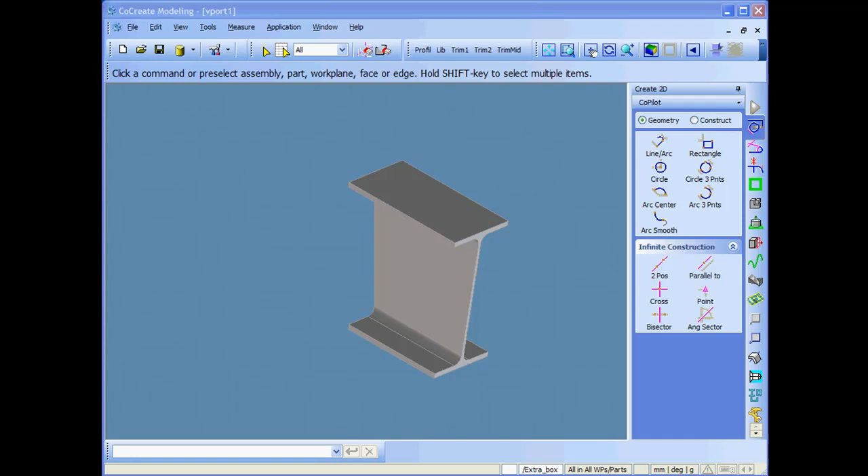So let's look at the screw connections in SolidGenius. Make sure the SolidGenius module is switched on, and here we have two profiles connected with two plates.

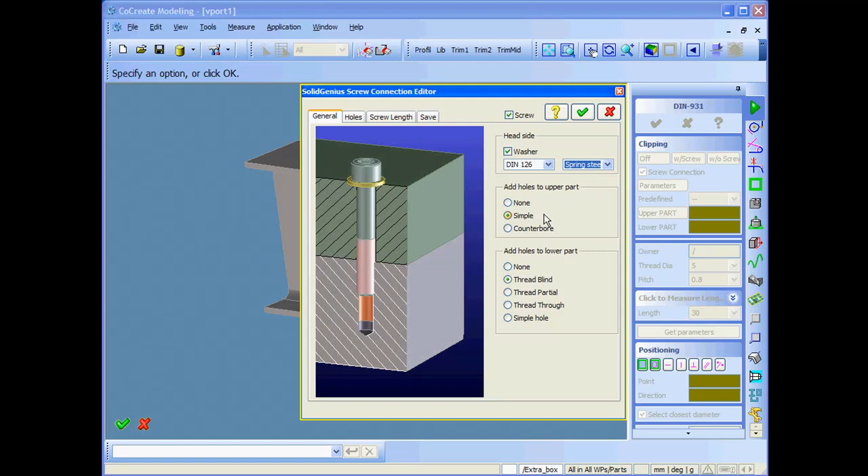I will show you a bolted connection consisting of screw, washer, holes on both plates, and nut. Let's select the screw. Every screw inside SolidGenius has its own screw connection menu. I select the parameters, visually setting the connection parameters. I select the washer with material, and on the upper part there will be a simple hole, on the lower part a simple hole as well. The holes will be machining holes, and I select the materials for washer and nut.

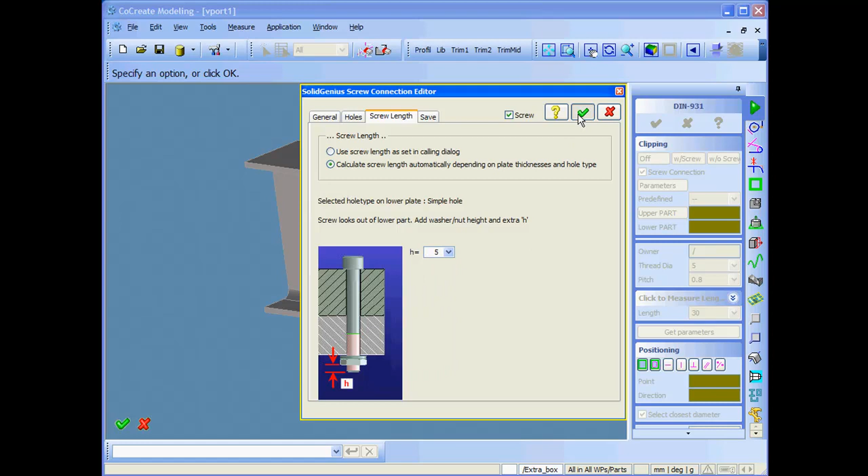In the second tab we can set the chamfers. The third tab lets me decide how much the screw looks out of the nut. That's all. So I select the upper part and the lower part. Now I just have to give a point for screw direction, and here we have some work plane and construction geometry functions embedded into the menu. This gives you the chance not to leave the dialog.

So here I can directly draw some construction geometry to set the position of the screw. This work plane will automatically be deleted when I leave the dialog. Let's set some lines. Now I got the middle points, and simply by selecting the point on the 2D, I select the diameter of the screw.

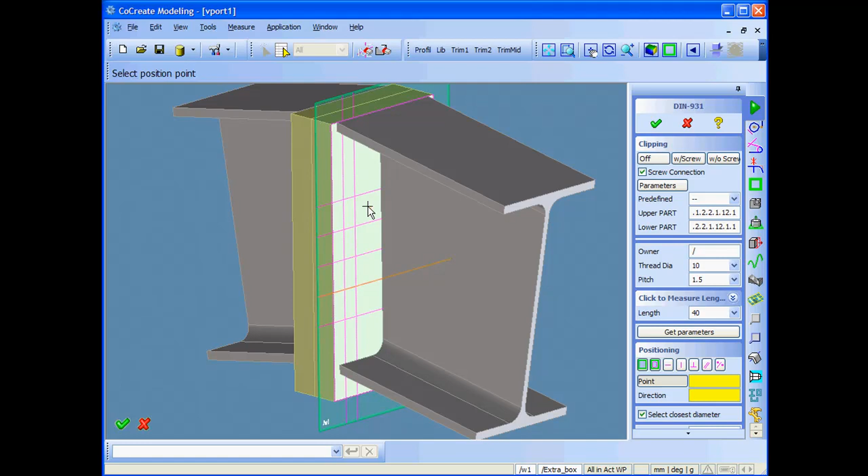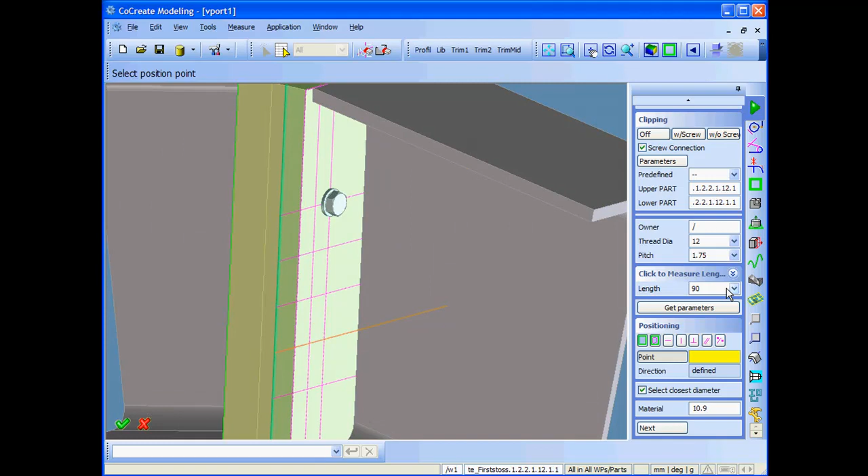The length is not important because it will be measured automatically. Even if I set any length, once I say next, the length will be calculated automatically. I change the diameter to make it a little bigger. Now I say okay, and you will see that the length of the screw has been automatically adjusted to the thickness of the plates plus the nut and the washer.

So I can immediately go to clipping plane, make a check without the screw. As you see, there are two machining holes, both simple holes, created on both plates automatically.

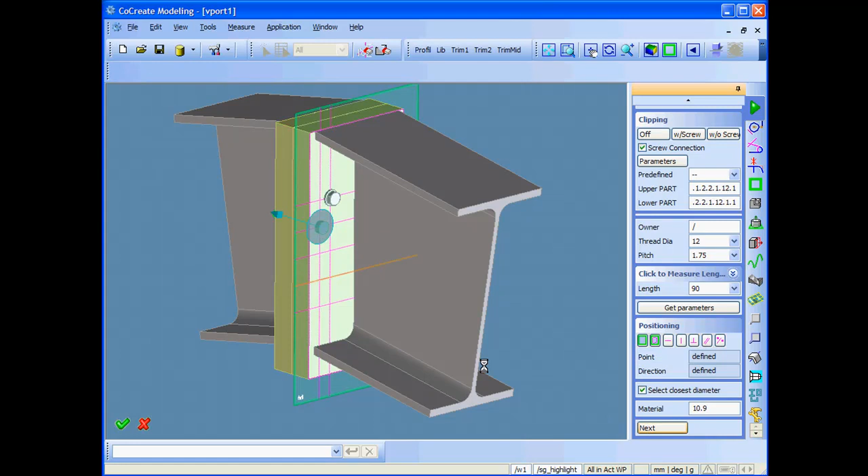Alright, so I continue. Next step, I stay in the dialog and keep selecting points, and with the next option, one by one, I do all necessary bolted connections.

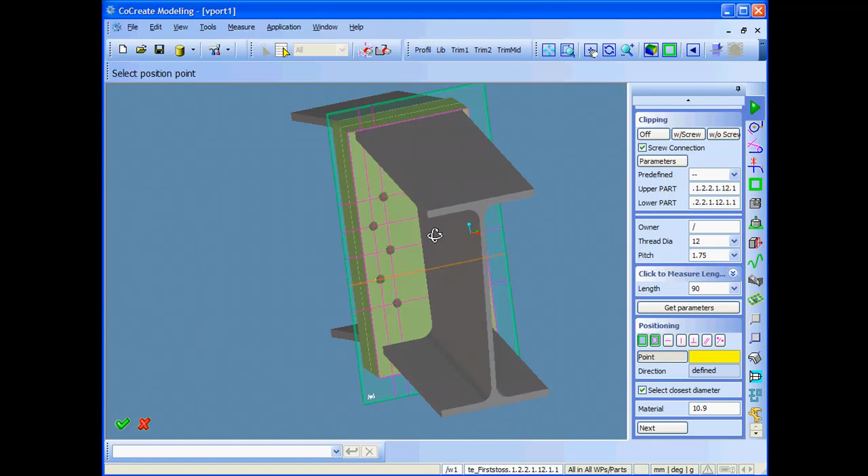Alright, now as you see we are all set. The holes are here on both plates. Now I want to continue on the other side.

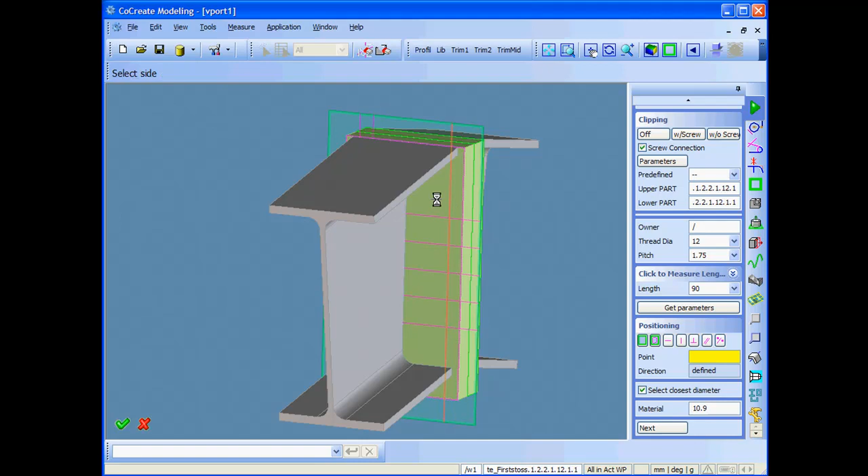I still stay in the dialog and add parallel lines 20 millimeters. Okay, that's all. Then I again select the middle point, and with the next button, because the parameters are still kept in the dialog, I just keep putting further bolts.

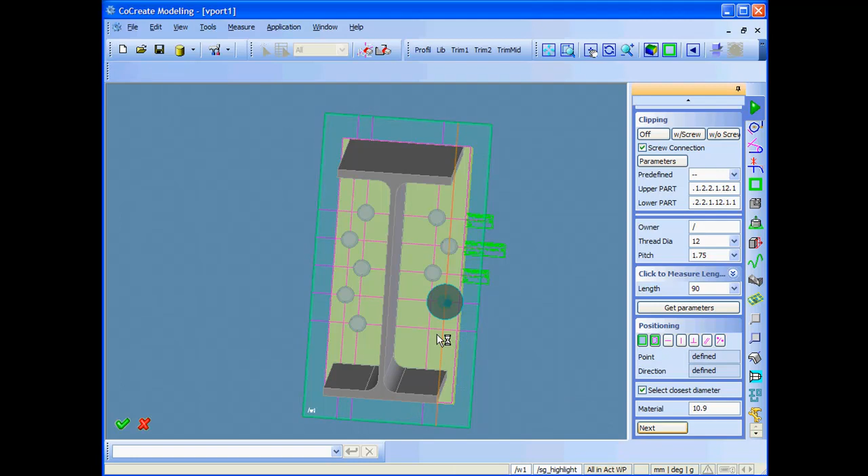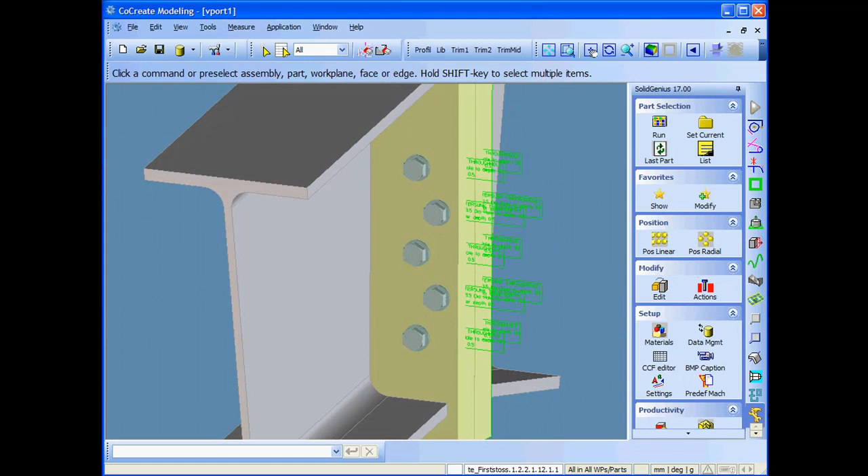Okay, this was an example with two plates. What would happen if you had more than two plates? SolidGenius also supports connections with more than two plates. In this case, all you have to do is define the upper plate as the first plate and all the other plates as the second plate.

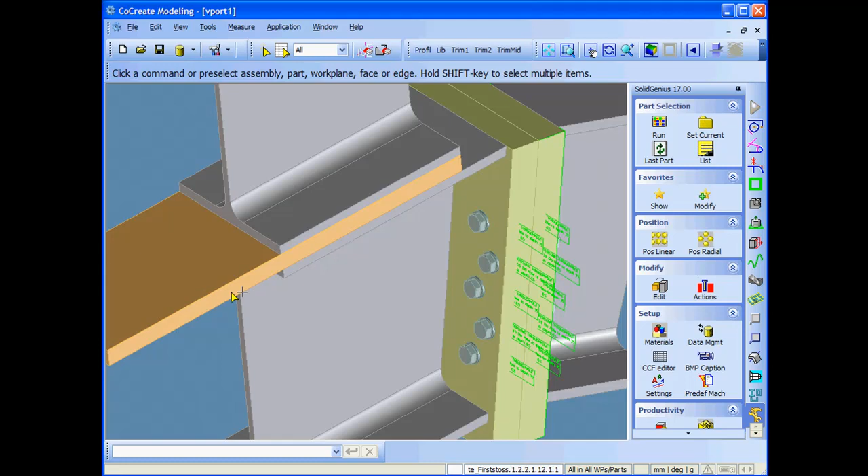So as you see, they're all shared parts, all the screws and nuts. Here's the example with three plates. We have plates 1, 2, and 3 which we want to connect. I select the same part, and the parameters are left over from the last selection. That's why I simply select the upper part as the first, and both parts in a row as the second and as the lower plate.

Okay, so I've selected two parts as the lower plate, and put the work plane again, making some construction geometry to find points.

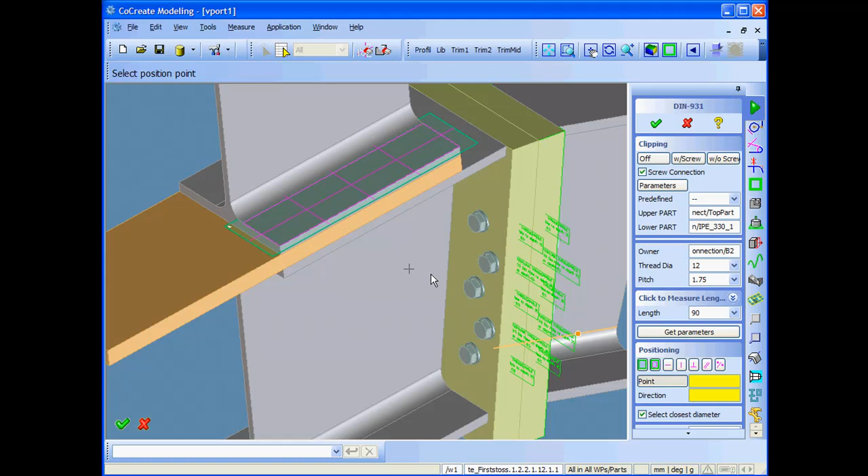Here we go. Now the feedback shows the last length, which was 90, and if I say next, at that moment SolidGenius calculates the necessary length, standard screw length, and as you saw, it took 65. So you don't have to deal with setting the lengths.

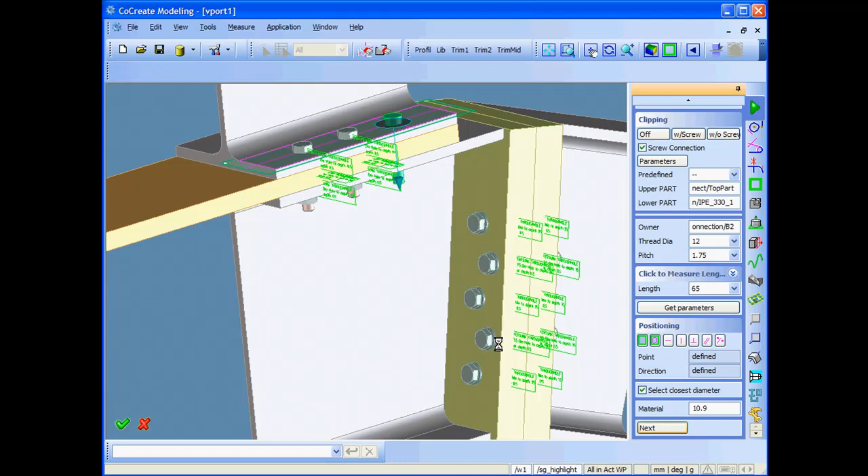I just show off the labels, machining labels. Then if I say yes, this work plane with the construction geometry disappears automatically.

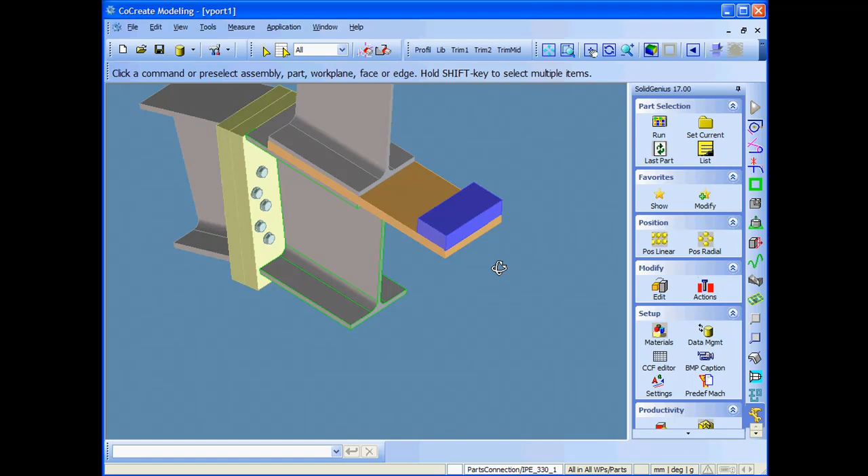Alright, another example to show you is a connection with a blind threaded hole. It works the same way. I select just any screw, and as every screw, this one also has the screw connection function inside.

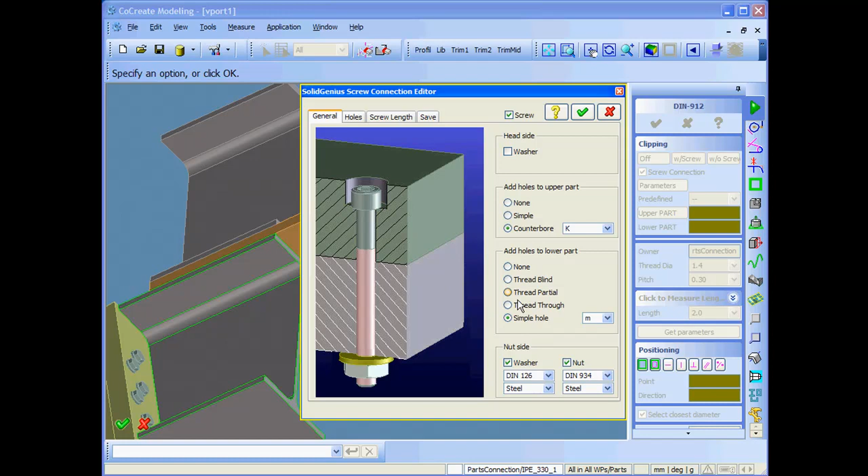I change the parameters. In this case, I would like to have a counter bore hole and no washer. Counter bore hole, okay, and I set a threaded blind hole, and as the screw length, I can decide how long the screw length in the last piece of the last part will be.

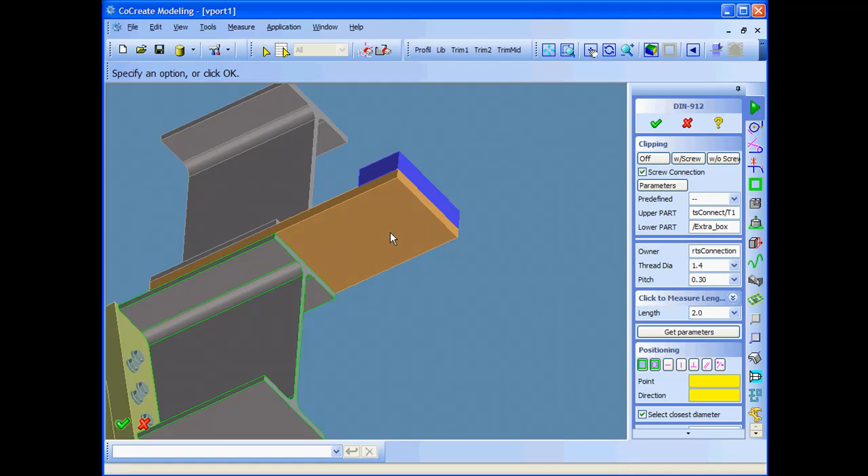Select the upper part, the lower part, and here again I project the upper one, and just to know the limits, center, bisector, bisector, both of them. So I've got these two points which I need.

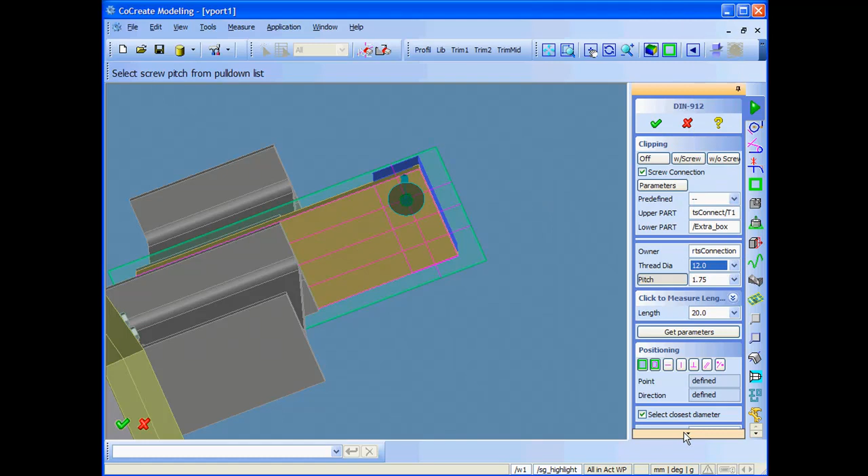Alright, select the point, say next. Again, the length is not important, so it will automatically calculate the necessary standard length of the screw, and put the clipping plane to check how it looks. This is the minimum screw length inside the second part, which is kept.

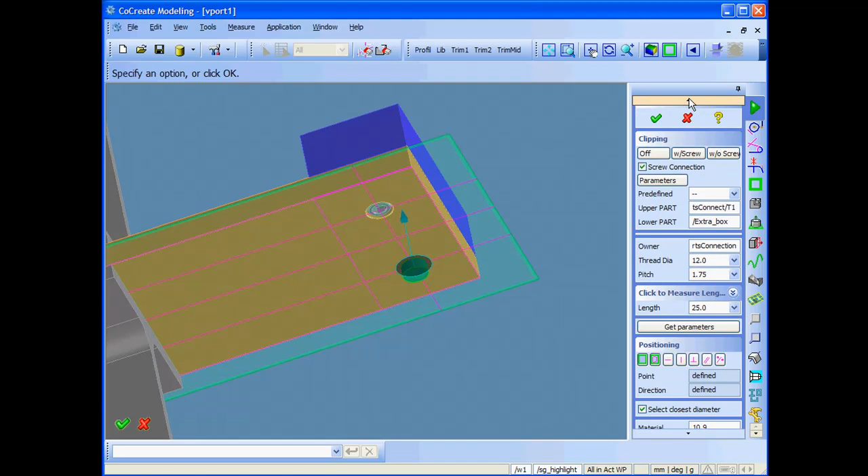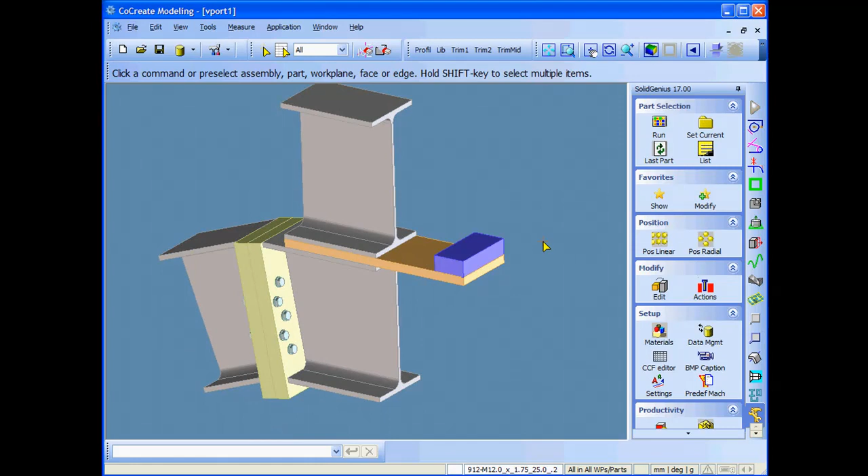Okay, so that's all. And just to remind you, you can also save your parameter combinations and reuse them as you wish. To do that, I start the parameter menu again, and simply give a name and say store.

So I go to the save tab, and I have one already. I select the diameter. If I don't select the diameter, I can use these parameters on every diameter, but I can also fix the diameter. In this case, I fixed it to M12 and say store.

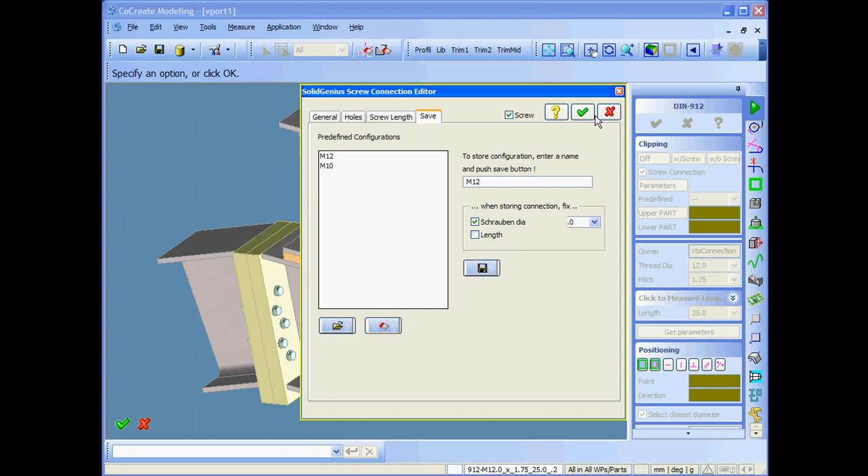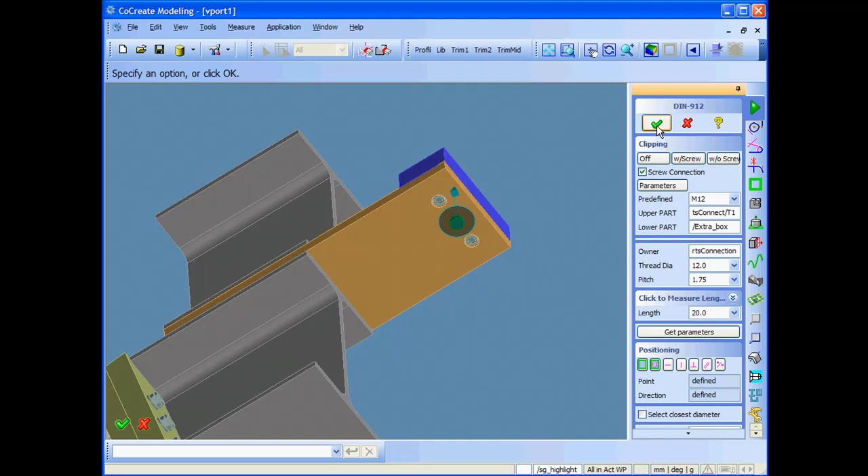Next time when I enter this particular screw in the predefined list, I will drop this down and see my values. In this case, you just have to click this, select the upper and lower parts, and select the positioning point, and all the parameters you have set are automatically read from the file. Okay, so thank you for watching.